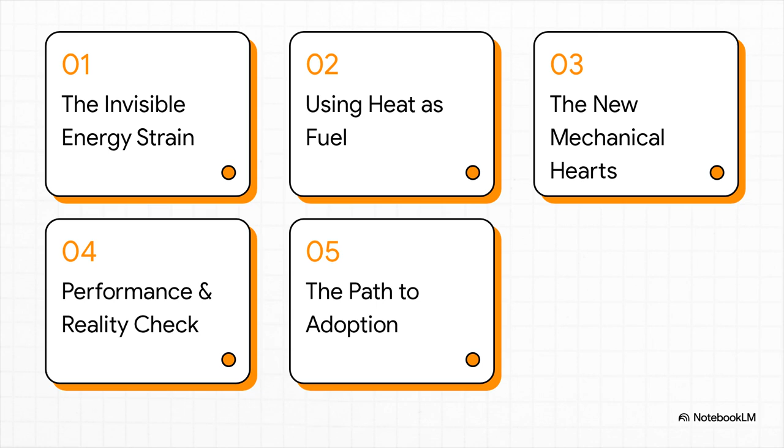Okay, so let's start with the big question. Why? Why are so many brilliant people trying to completely reinvent something as fundamental as heating and cooling? Well, it really just boils down to a massive problem of scale. Take a look at this number, 280%. That's the projected spike in just residential cooling demand by the middle of the century. You can just imagine the kind of stress that's going to put on our electrical grids.

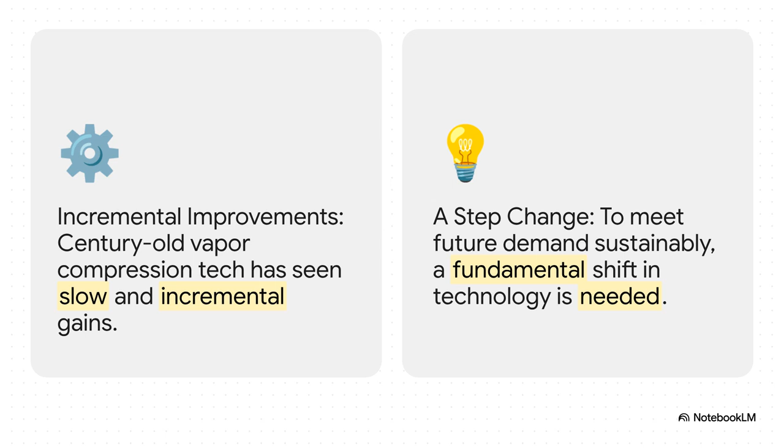It's almost unbelievable. And here's the thing. We can't just chip away at this problem with small tweaks. The basic technology in our air conditioners, the vapor compression cycle, has been around for 100 years. Yeah, it's gotten better, but it's pretty much hitting the limits of what it can do. To deal with that 280% jump, we need a whole new playbook. We need a step change.

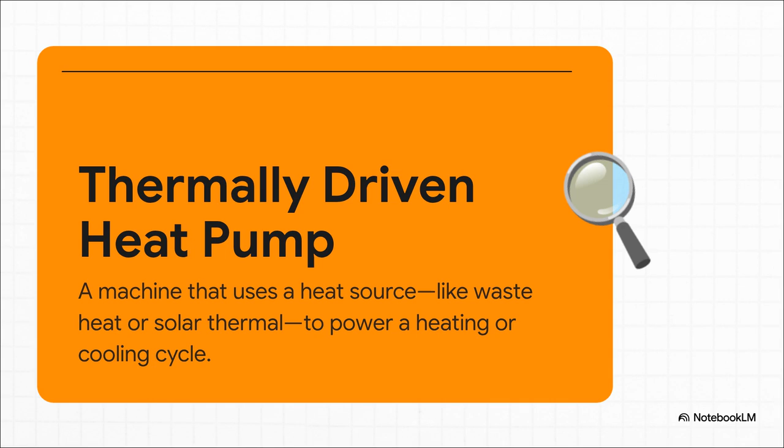And this is where we get to a really fascinating, almost backwards-sounding idea. What if we could use heat itself as the fuel to make things cold? That's the big idea behind something called a thermally driven heat pump, or TDHP. It completely flips the script. It takes a heat source, and this could be waste heat from a factory or even just hot water from a solar panel, and it uses that energy to run the whole show.

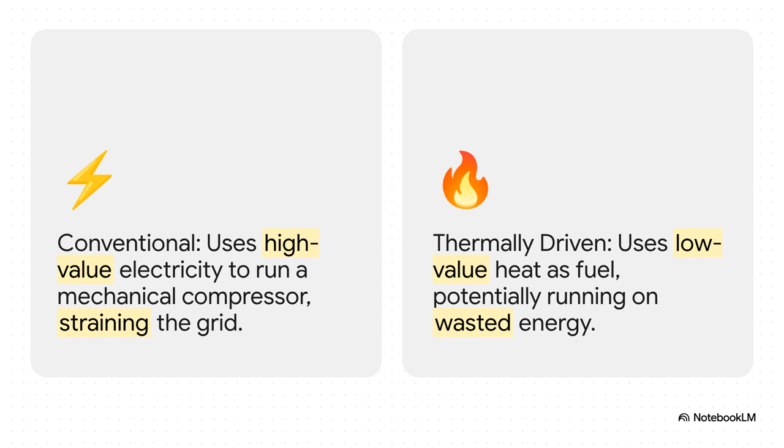Now, what's so cool here is the difference in the kind of energy being used. Your standard heat pump uses electricity. That's high-quality, very valuable energy to power a big mechanical compressor. But a TDHP can run on low-quality heat, the kind of energy we are literally just venting into the atmosphere every single day. It's an incredible shift.

So how in the world does it work without that compressor? The easiest way to picture it is with a sponge. Imagine you have this special material that just loves to soak up refrigerant gas, kind of like a sponge soaks up water. That's step one. Then you add heat. The heat acts like you're squeezing the sponge, forcing all that refrigerant out as a high-pressure gas. And it's that pressure, created by heat, not a motor, that powers the whole cooling cycle.

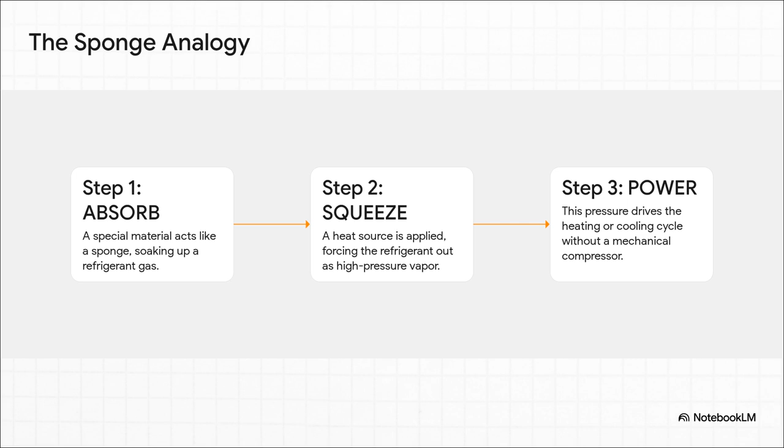And here's what our simple sponge analogy looks like to an engineer. Now, don't worry about the fancy terms. Just follow the circle. You start with adsorption, that's the sponge soaking everything up. Then you add heat, which builds pressure. That leads to desorption, squeezing the sponge. That high-pressure gas goes off, does its cooling job, and then the whole system cools down and starts the cycle all over again. It's this elegant, continuous loop, all driven by heat.

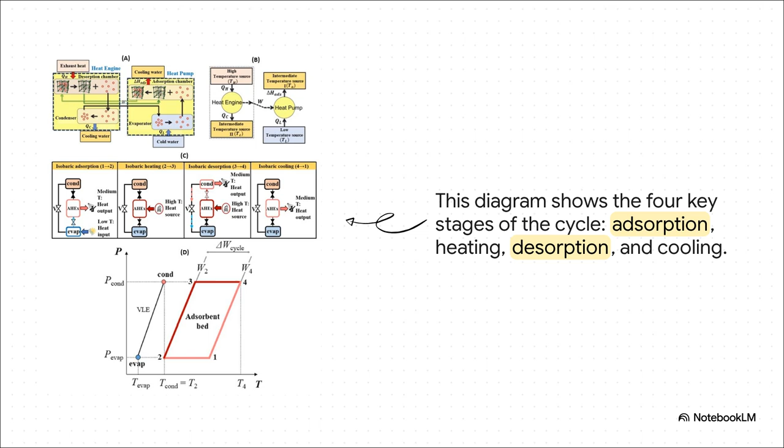Okay, so that's the core idea. Pretty cool, right? But now let's get into the specifics of how this is actually being done. Thermally driven is a big umbrella, and there are a few really interesting technologies living under it. This table gives us a great bird's-eye view of the three main paths. First up is absorption, with a B, that uses a liquid sponge.

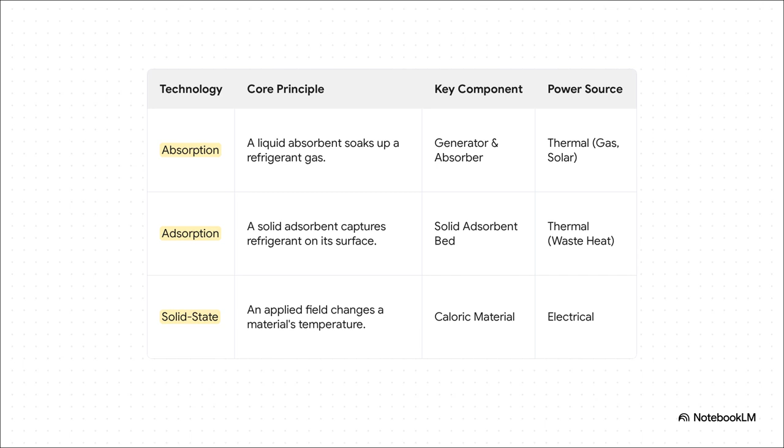Then there's adsorption, with a D, which uses a solid material. And finally, you've got solid-state technology, which is a whole different ballgame. It uses electric or magnetic fields to directly change a material's temperature. Let's dig into that solid-state idea for a second, because it's just amazing.

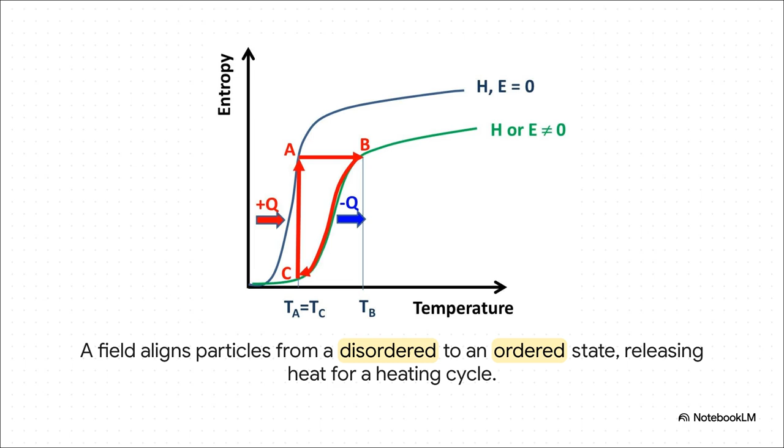Then, you turn off the field. The atoms all go back to being messy. And to do that, they have to suck up heat from their surroundings, which makes everything around them cold. You're creating heating and cooling just by organizing atoms. How cool is that? So, we have these incredible concepts, right?

But a great idea is one thing. Real-world performance is something else entirely. How do these new technologies actually stack up against the systems we already have? The way we measure this is with something called the coefficient of performance, or COP.

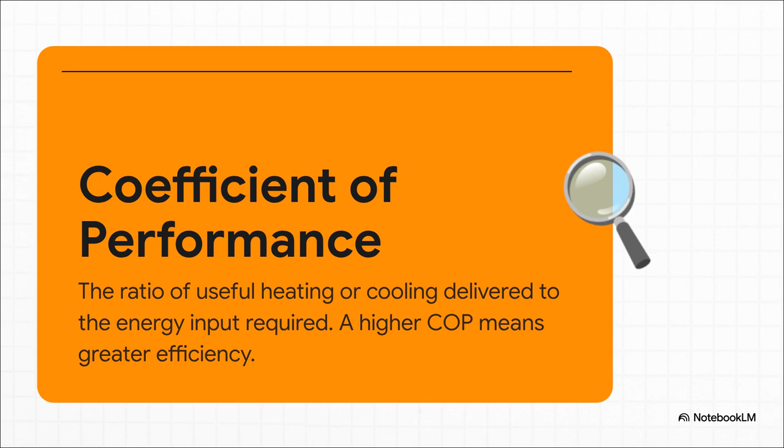It's actually really simple. For every 1 unit of energy you put in, how many units of cooling or heating do you get out? A COP of 3 means you get 3 units of cooling for 1 unit of energy. So, higher is always better. And this chart, well, it tells a fascinating story.

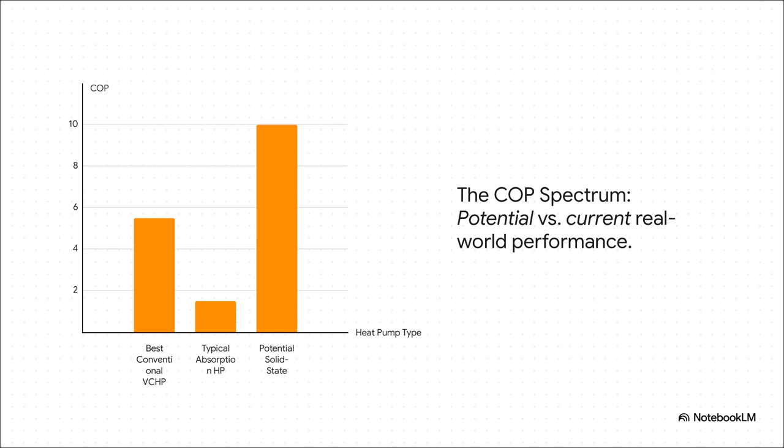But we do have to ground ourselves in reality here. This chart shows us the number of research papers published on different materials. And you can see that metal organic frameworks, or MOFs, which are some of the most exciting new materials, they're still just a tiny sliver. Most of the work is still happening on older materials. So we're definitely still in the early innings.

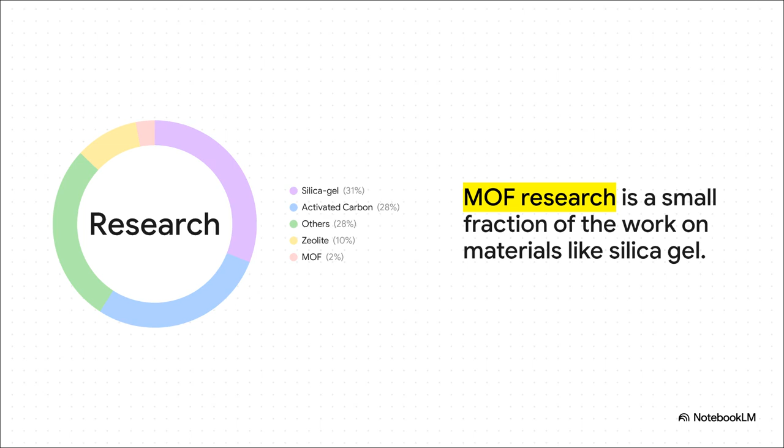Which brings us to our final and maybe most important section. How do we get from a cool material in a science lab to a reliable machine you can install in your home? What's that journey actually look like? This timeline gives us a really good snapshot.

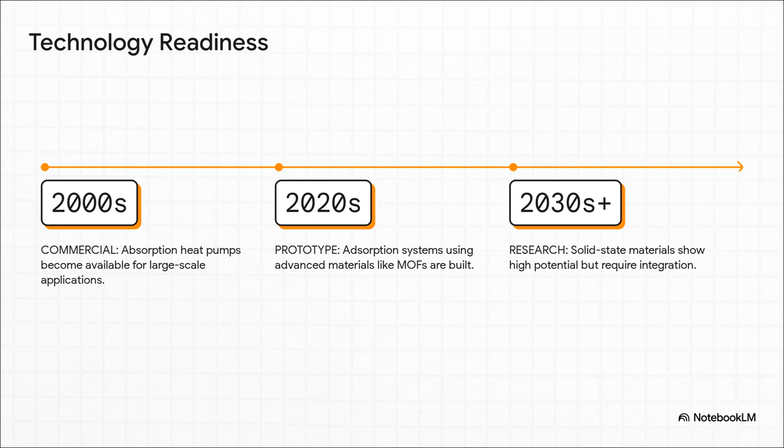Absorption systems, they're already here. You can buy them commercially today, mostly for big buildings. Adsorption systems with those fancy MOF materials, they're at the prototype stage. They exist, they're being tested right now. And solid state, that's a bit further down the road. The materials are showing incredible promise, but building a whole system around them is the big research project for the next decade. And getting to the finish line means clearing some pretty big hurdles.

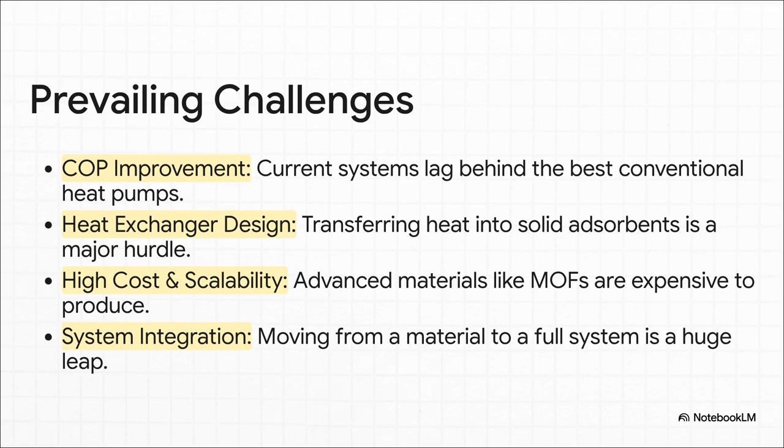First, that COP number, the efficiency, it needs to get better to compete. Second, just the physical challenge of designing heat exchangers for these solid materials is a really tough engineering problem. Third, cost. Advanced materials like MOFs are still way too expensive to mass produce. And finally, there's just the massive leap from having a cool material to having a complete, reliable, affordable system that works for years. These are the big puzzles that researchers are working on as we speak.

So all of this leaves us with a really powerful idea to chew on. In a world that's getting hotter, the very heat that we're currently just wasting could become our single best tool for keeping ourselves cool. It's a complete shift in thinking, and it's one that might just change everything about our energy future.